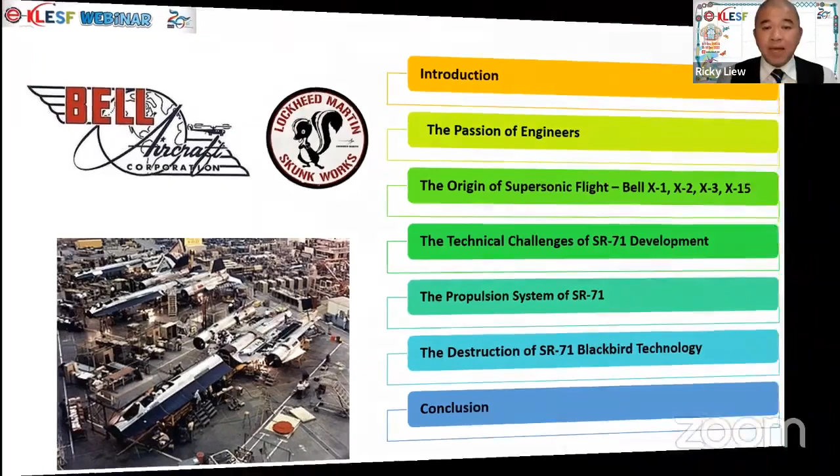Aviation industry is a highly regulated industry. The presentation here is very much general information and my own personal experience, what I have observed, the engineers that I've talked to, the research and development factory or the plant that I've visited. All this experience I gathered, and I plan to share it with all of you today.

The presentation is purely for knowledge purposes, and any part of this presentation does not negate the current requirements and specifications laid down. So don't say, oh, Ricky said this can, Ricky said cannot. What Ricky says is not important. It is actually what the regulatory body says, what the authority says, what the aircraft manufacturer says. Those are the important compliance that industry players have to comply with. For me, I'm just sharing information and my personal observation; it does not represent anybody.

I would also like to acknowledge all the sources of the information that I'm sharing with you here. They are all accessible to you. They are not high secret. They are all accessible from the books, from the internet, from the media sources, and some of the records or even presentation papers. What I did is compile it, couple it with my observation and experience, and make it into slides so that I can share with all of you. Hopefully, I'm able to inspire you all to consider taking up engineering subjects, technological subjects, science, or even mathematics subjects.

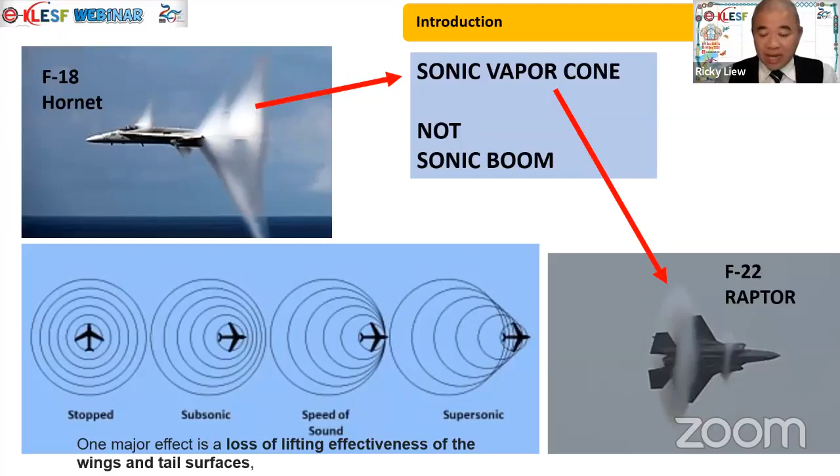Something we need to know: we talk about Mach number very much. What exactly does Mach number mean? Mach 1 is the speed of sound. The Mach number is a ratio of the object speed, the velocity of the plane or object, over the velocity of sound. So object speed over the speed of sound gives your Mach number. Mach 1 basically means the object traveling is at a speed equivalent to the speed of sound.

But what I'm trying to share with you today is not just about sonic speed. I'm talking about high supersonic speed. High supersonic speed is more than Mach 1: Mach 2, Mach 3 and above we call high sonic speed. But once you go beyond Mach 5, it becomes hypersonic.

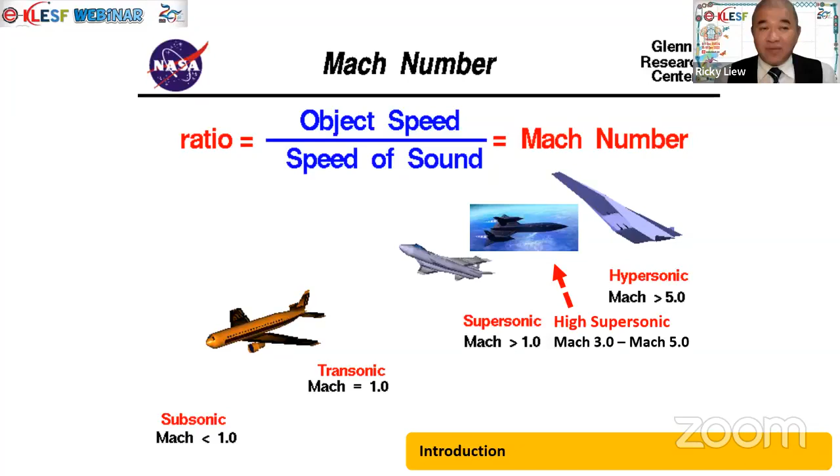So that is another different category of speed. So what I'm trying to share with you today is somewhere between Mach 1 to Mach 3 point something. Yeah, that's why I call it the high supersonic speed. Very interesting, because we started off with very low speed. Yeah, very low, probably 0.1 or 0.2 sonic speed. Until today, we are able to fly up to Mach 6, Mach 7. If you are talking about rocket, it is even much faster, which I'm going to show to you later.

Yeah, just a comparison. For the benefit of the participants here, just for comparison, what do you mean by Mach 1? Now Mach 1, we are talking of a speed of about 1,235 kilometers per hour, roughly. Because the Mach number changes when you are higher and also when you are lower at sea level. It is actually easier to achieve Mach 1 when you are at a high altitude. For example, when you are at 70,000 feet or 80,000 feet, due to the lower temperature and pressure, you actually achieve Mach 1 at a lower speed compared to when you are at sea level. But generally, for reference purposes, so that you have an idea what we are talking about.

So Mach 1, we are talking about 1,235 kilometers per hour. Now, when we are walking, our walking pace speed is about 8 kilometers per hour. Let's say we are just a general walk. We are not talking about the people who walk for competition. A general walk will be about 8 kilometers per hour, and the Mach number, if you convert it, is 0.0065. It's very slow. When we travel to Penang in the car at 110 kilometers per hour, the Mach number is actually 0.09.

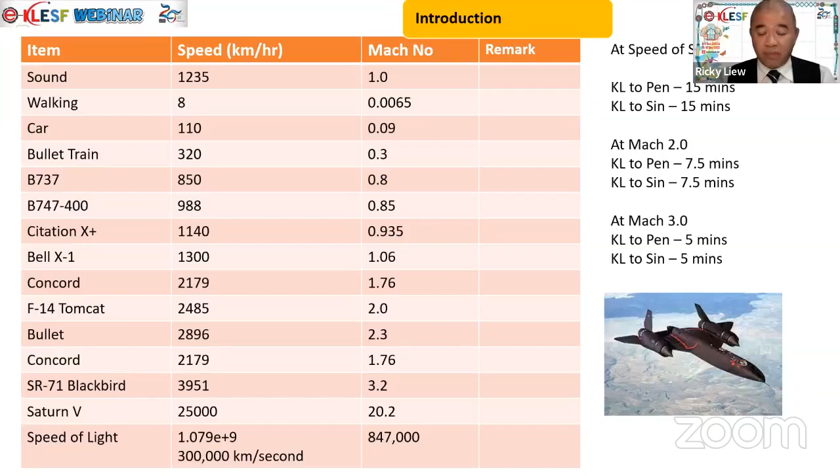So whenever humanity wants to develop, evolve and improve in terms of advancing their technology and quality of lifestyle, engineers play a very important role. Imagine your house doesn't have an aircon, because the engineers never designed or built an aircon for us. How are we going to have a comfortable life at a very hot temperature? So engineers have always been there for the benefit of mankind. It's a very noble profession.

I personally have touched the 1st, 2nd, 3rd and 4th generation fighter jets. The 5th generation, because of its stealth, highly secretive nature, I have not had a chance to touch or even view at a very close distance. But the rest of the planes, 1st to 4th generation, I have touched and felt, and I personally went and checked some of the systems on the airplane.

Now, if we want to talk about flight, there are these 2 brothers that we always have to appreciate. I think some of us would have heard about them. They were bicycle mechanics. They were not like you who are studying in university, having good lecturers and a good lab to do your tests. They were just bicycle mechanics who were very, very passionate about flying.

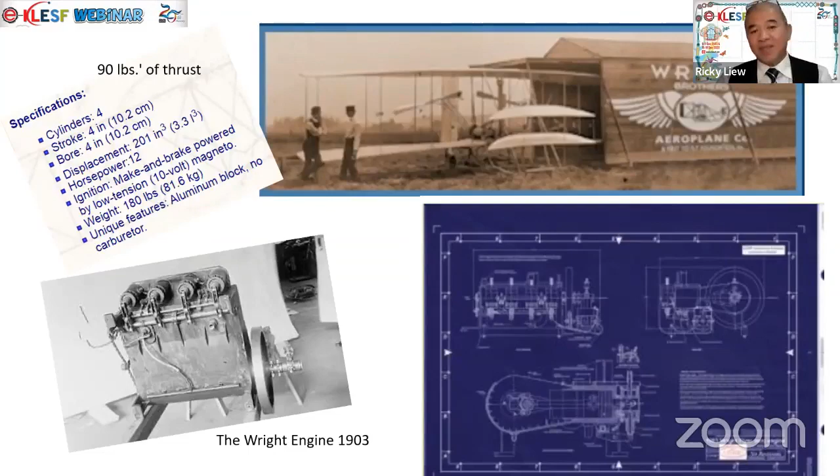Yeah, they had a lot of broken bones, twisted knees and ankles and all those, all for the sake of humanity's development.

Now moving forward, after the Wright brothers, the knowledge that we gained from the Wright Flyer actually moved engineering to the next level. That means the engineers, instead of flying a Wright Flyer with a very low powered engine, started looking for ways to fly faster.

Now in this talk, because we are talking about sonic speed and hypersonic speed, I will concentrate on the segment where they developed the supersonic airplanes. After the Wright Flyer, a lot of other planes came along, the Stratocruiser, Boeing, the Douglas company, with a lot of piston powered engines. But here we are talking about the sonic speed airplane.

Now, the sonic speed airplane has to start from this engineer, called D. Beeler. D. Beeler was the project engineer in charge of the XS-1, the X-1 aircraft, which was used to fly at sonic or even supersonic speed.

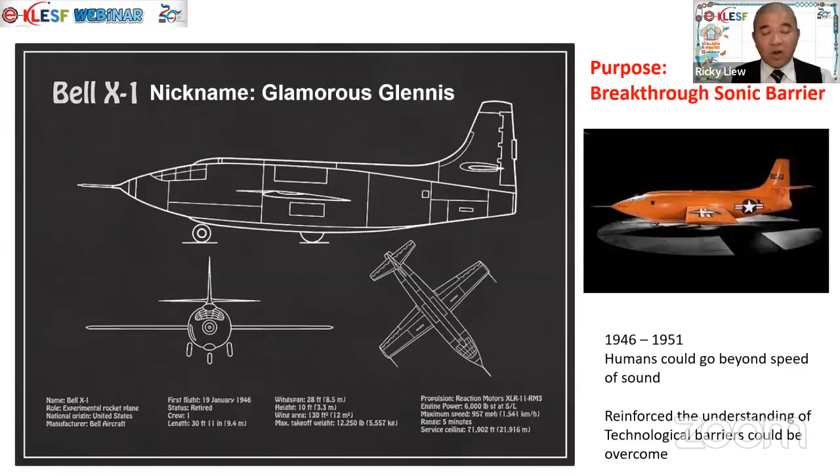It also reinforced the understanding of technological barriers, the sonic boom, the sonic shock wave. How are we going to overcome it? All the data were being gathered. If you look at this airplane, it is only a single seater. It's a very small plane, full of instrumentation and recorders, hundreds of kilograms of sensors, transmitters and data recorders. All these data recorders are mechanical or analog recorders. So the engineers came up with a lot of instrumentation to put inside this airplane.

This airplane got no weapons, nothing on. It just has rocket engines to make it fly as fast as possible. Even then, it can only fly for about 2.5 minutes, 150 seconds only. That is the window they have to collect all the data they can, so that the data will be passed back to the engineers, the scientists, the researchers, and then everybody together study and analyze and come up with a solution. And all these are manual calculations.

So being an engineer, if you are a person who has no issue with mathematics, then I think engineering is a very suitable position for you. Of course, nowadays we do manual calculation, especially when we are studying. But once you work in the industry, usually it is all computer programs, because we have the programs to do the finite element analysis, your heat transfer rate and all those. But for engineers from the start, we have to be strong in our calculation. Our mathematical skills are important.

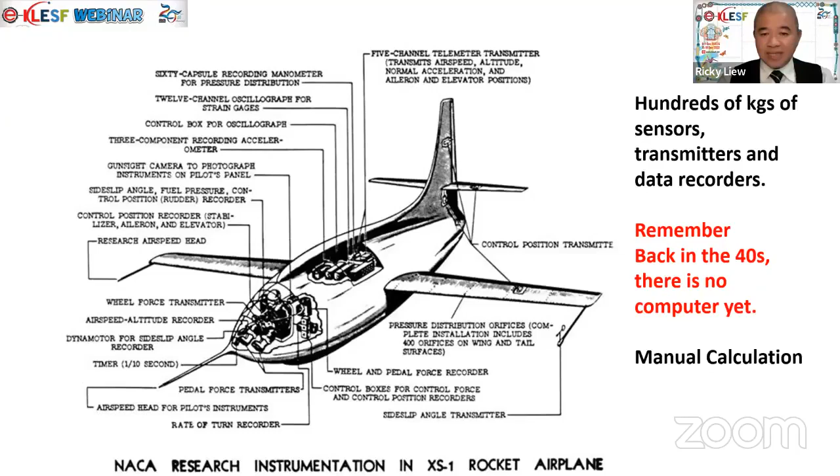This is the cockpit. This airplane, you can find it in the museum in the United States. If ever you have a chance to go to the United States like me, I've been traveling to the United States many times. Every time I land at a particular state, I always check first before I arrive whether there is any aviation or aerospace museum there or not.

Because if there is, I definitely will visit these museums and then take pictures and see how the engineers did it, where now we don't see it anymore. The past engineers, they were having so much limitation, no computer power, limited material, limited understanding, limited data about characteristics, and they managed to build the plane. So that always amazed me.

So design engineer D. Bieler is actually the first person who put a trimmable horizontal stabilizer on the airplane. Today, if you fly on a 747, a 737, a 777, even a 787, an Airbus 330, 350, all these airplanes actually have a trimmable horizontal stabilizer, where the horizontal tail of the plane can actually be moved, either to decrease the angle of attack or increase the angle of attack.

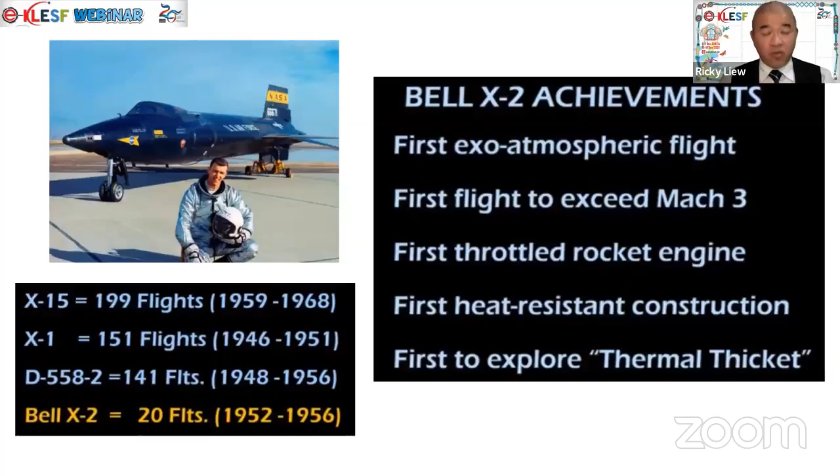Now, how do they launch the Bell X-1? They require another airplane, the B-29, to carry the X1 airplane. Because the X1 is very heavy for its size, because it uses a steel alloy construction, and you know steels are very heavy.

And why do they need to use steel? Because of the heat. You cannot use aluminum to make the fuselage of the airplane, because the moment you reach Mach 1, Mach 2, Mach 3, the skin friction against the air will generate a lot of heat, and that will cause a lot of problems on the airplanes. So they have to use steel.

Now, because it is a steel construction heavy plane, and at that time the turbojet or the turbofan engines were not available or in the infant stage, the fastest way to study sonic speed was to use the rocket engine, where you put in the fuel and the oxidizer, and then you just light it up, and it just continues to burn.

Okay. Now the restriction is that it only has a very small 150 seconds to collect all the data required. From the airplane speed of the B-29, the moment they drop the X1, the pilot in the cockpit will switch on the rocket engines, chamber 1, chamber 2, chamber 3, and then chamber 4, and they are supposed to control the airplane right up to about 43,000 feet,

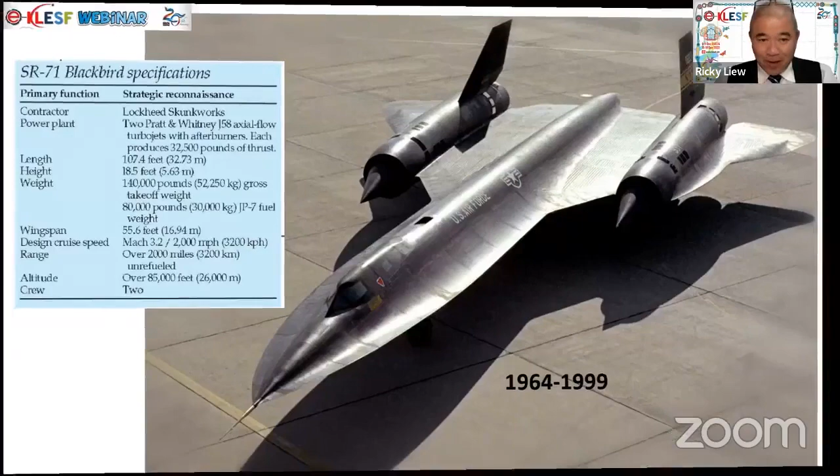Now, where does Kelly Johnson start from? Kelly Johnson is actually the engineer who was very passionate about airplanes. Even when he was a student, if you look at this picture here, this is at Michigan University, his university. At that time, he was still a student. And they saw this Lockheed Electra plane, the original design, being tested in his university wind tunnel. So he went and looked at the airplane, did a few mental calculations, applied a few principles of aerodynamics on this airplane, and he knew that this airplane is not a stable plane, it's an unsafe plane.

With the knowledge and the passion that he has in aerodynamics as an engineer, by looking at the airplane, he can actually know whether it's safe or not safe. And eventually, Lockheed modified the airplane and made the famous Electra plane. It is actually an H-tail plane. This is only a T-tail plane, very unstable. So Kelly Johnson, as a very junior engineer, came up with the airplane with the H-tail. Okay, this is his bird.

All right. Kelly Johnson also developed a lot of other fighters. We are talking about the P-38 Lightning, the Starfighter, and also the other spy plane, the U-2. All these are his ideas. So you can imagine becoming an engineer, you want to develop and defend a nation. How do you do it? It is by the application of your engineering knowledge for the nation. And that is what Kelly Johnson did.

Now, the SR-71 was actually built in 1964. It flew from 1964 to 1999. There were 32 of it built, flying at the speed of Mach 3.2, very high supersonic speed. Not one of the airplanes was ever shot down by the enemy, and this design overcame a lot of engineering problems associated with heat, not so much the supersonic shockwave anymore. There are some shockwave issues, but what they gathered from the X-1 has been applied and overcame a lot of problems. But there were also other issues that Kelly Johnson needed to overcome.

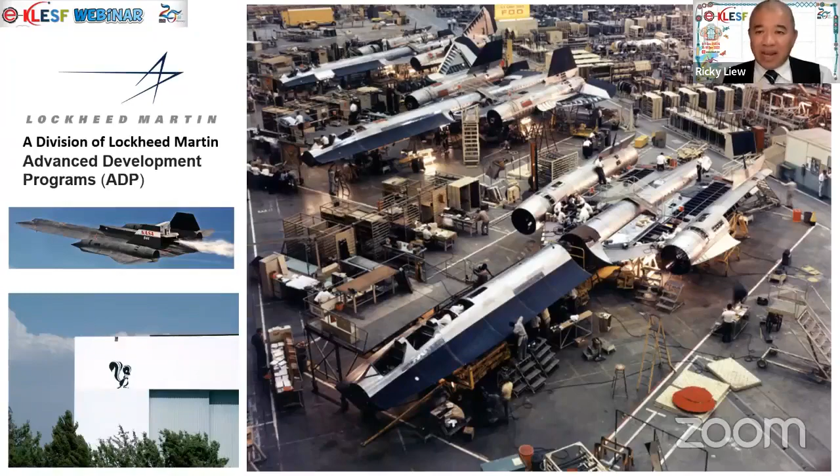And that is how passionate Kelly Johnson was. And the department is so famous, even until now everybody knows it as the Skunk Works, under Lockheed Martin. This is actually a division of advanced development programs. This is a picture. They don't build this airplane anymore. The blueprints are all destroyed. You cannot even find the molds to build the airplane anymore. But this is a picture of the factory, how it was built and assembled by the engineers, the technicians, and also the technologists. Over 30 of them were built.

Now, because of Kelly Johnson, remember just now I said, if you are strong in mathematics, if you are good in mathematics, one of the fun things you have is actually taking up the engineer's job, because you will use a lot of formulas to overcome and calculate a lot of problems and solve a lot of problems.

and incorporate them into their design of the planes, design of the wings, design of the finite element, design of so many things, the power, propulsion, and all those. Because the formula, the complex mathematical formulas, it is all there. It's just that you apply and use this rule. So Kelly Johnson came at the time of using this ruler.

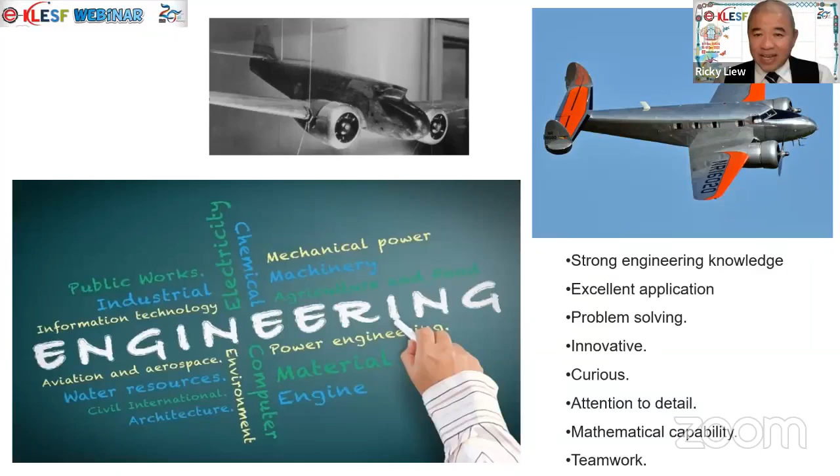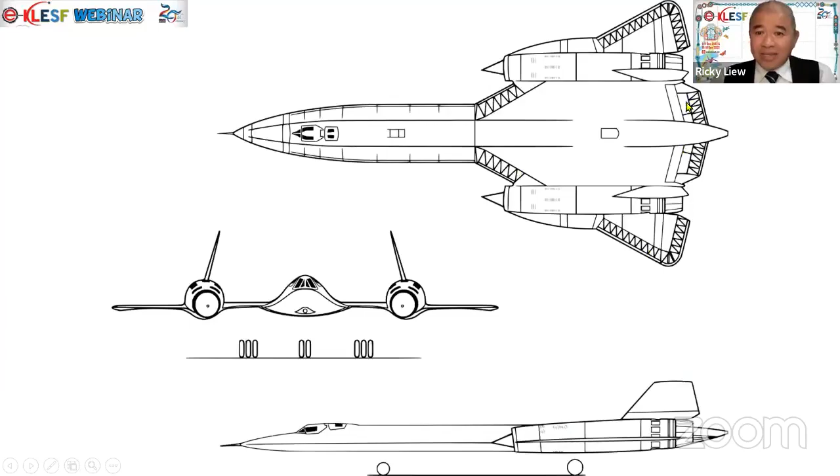Now, this is the SR-71. If you look at it, the diagram here is very futuristic, very interesting. Look at the engines, so long, and the shape of the delta wing, and you can hardly see the wing. You can see the engines more than the wing, isn't it? If you look here, on the side, it's more engine area, you can hardly see the complete wing. It's very small and stuck.

Now, I mentioned earlier, how did Kelly Johnson overcome it? If this airplane flies at Mach 3.2, the heat generated on the fuselage, on the cowlings, will expand it. So when the SR-71 flies at Mach 3.2, the length of the airplane can extend as much as 6 inches or even half a foot. That is a lot. Your wing might even get a little bit expanded.

How do you counter this expansion? Otherwise, your skin will be under stress. It already has heat stress, plus the expansion. Now you even have tensile stress. How do you overcome all this? So if you look at the wing design here, you can see all these lines. This is what Kelly Johnson incorporated.

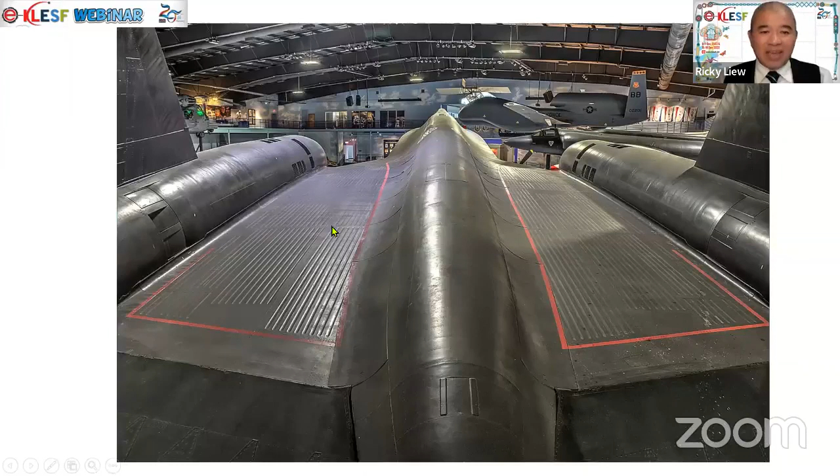When it is expanded, it will become flattened. If the wing is hot, it will become flattened and you don't see the lines anymore. And the airplane flies perfectly. Simple solution, but how many have actually thought about it? Engineers can turn a complex problem into a simple solution. That's our joy.

This is also another view of the plane. From the side view, it is actually a two-seater. You can see here the second seat, which is the navigator. The pilot is at the front. And these are the engines, J58 Pratt & Whitney engines. And this spike cone here can retract and extend.

Remember I said the shock wave is very damaging to the airplane. So how did they overcome it? They control the shock wave so that it does not reach the detrimental situation where your engines lose function and your airplane goes into a high-speed sonic stall. Okay.

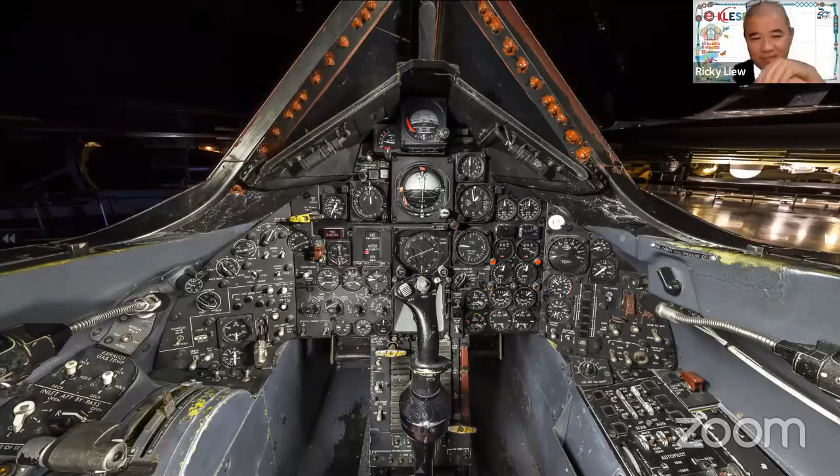Now, steam gauges. We call these steam gauges. The SR-71 was built in the 50s and started to fly in the 60s, and you can see inside all the analog gauges to monitor the whole system of the airplane, where the engineers incorporated the control switches, all in the cockpit. So you can imagine the amount of systems interfaced and built into the SR-71. And every switch, the pilot needs to know, the engineers need to know, in order to fly this airplane safely.

Now, we want to go to Mach 3.2, high supersonic speed. You don't go blindly. Correct or not? We cannot just go blindly, otherwise you will be in danger. So the engineers built all these instruments, including the control column here at the center. On the left-hand side, if you see my arrow here, that is the throttle quadrant. Now you can control the power: low power, middle power, climb power, thrust power, max takeoff power, everything. Whereas the rocket engine just now, the X-1, cannot.

So the engineers evolved the design in such a way that, okay, thank you for your data, thank you for your information. I'm now changing some of the information you have and incorporating it into the SR-71. And this is what you see.

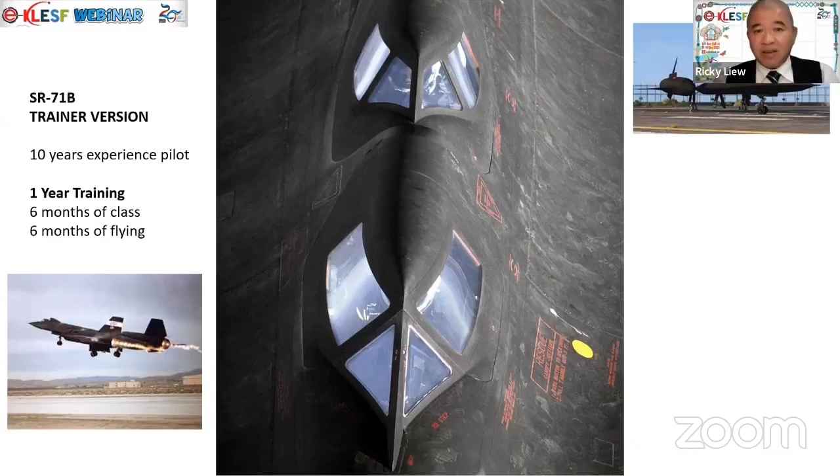Yeah, you can see it. I have seen it. I've touched it. It's a marvel. I've seen it a few times in the Aviation Museum in the US. It is a beautiful plane and it is a legend. When you look at this airplane, you remember the engineers who actually made this possible.

85,000 feet, it can fly at 85,000 feet, which is actually about 25 kilometers, with an ambient temperature of -55 degrees C, and only an atmospheric pressure of 0.4 psi. On our ground level here, we have about 14.7 psi. But as the SR-71 flies up to 85,000 feet, the air is so thin. How are you going to get your power from the engine?

But the J58 has been designed to be able to continuously produce power as long as there is air. Even though it is only an ambient pressure of 0.4 psi, you will be able to have sustained combustion inside your turbojet engine. This is a turbojet engine. It is not a rocket engine. It is a turbojet engine.

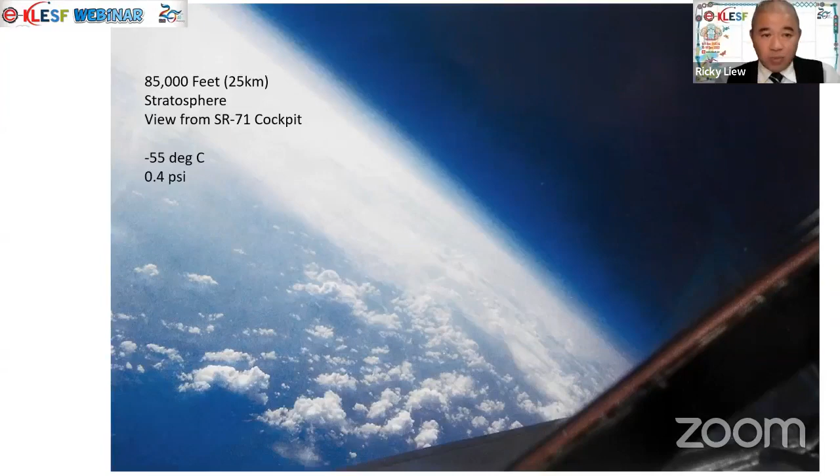Another view of SR-71. Remember, I said 32 of them. Out of 32, how many actually crashed? Anybody can guess? I mean 32 of them. Actually, 12 have crashed, because it is not easy to fly this SR-71.

None of it was shot down by the enemies. Every time the enemy tried to shoot this airplane, they had difficulty because it's flying too high, 85,000 feet. And even when the enemy approached this airplane, all this airplane has to do is put on the speed and fly at Mach 3.2, because there was no other plane in the world that could catch up with this airplane at that time. Mach 3.2, it's flying too fast.

This is the pilot who goes up in the SR-71. Remember, even though the engineers developed the technology for the high supersonic airplane, the pilot also needs protection. So the pilot actually wears an astronaut-level kind of suit, where the suit itself is their living environment. 85,000 feet is very cold, so they basically have to live in a suit that is air conditioned.

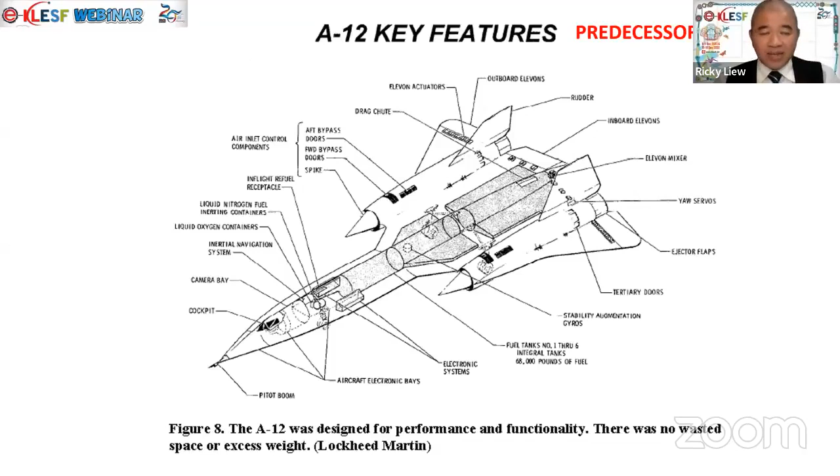But this SR-71, they store it in the fuselage. Why do they store it in the fuselage? Number one, there's no other space. Number two, the fuselage will be heated up, and the heat will be used to heat up the fuel before going into combustion.

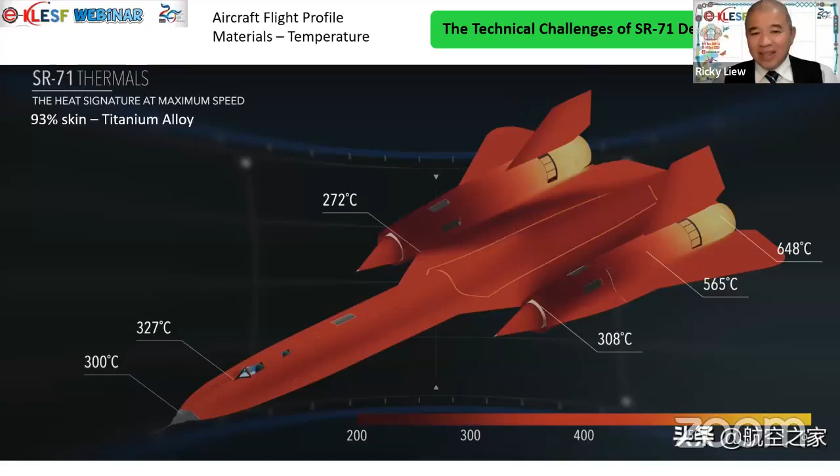Now this is a graph of the temperature. And they fly at Mach 3.2. The material they use to build this SR-71 has moved from steel to titanium. Remember just now I said X1 is made of a steel alloy. We cannot put steel alloy on an SR-71 because it will become too heavy and not practical. So they came up with a new alloy. They call it the titanium alloy.

And the titanium alloy is able to take a lot of very high temperature, as good as the steel, but then it is very light. So the majority of this airplane, the fuselage and all those, are actually made of titanium. Why? Just look at the temperature here. At the nose itself it is already 300 degrees centigrade, 3 times the heat of our water boiling temperature.

Now, if you look at the cockpit area near the window here, it is 327 degrees C. Remember I said just now, even the pilots have to wear an air conditioning suit. It's because of this heat. And if you go towards the tail, especially near the engine exhaust, it is 648 degrees centigrade. On the skin itself, temperature is so high. The only way the engineers could overcome this problem at the time was to use a titanium alloy. 93% of the skin uses the titanium alloy.

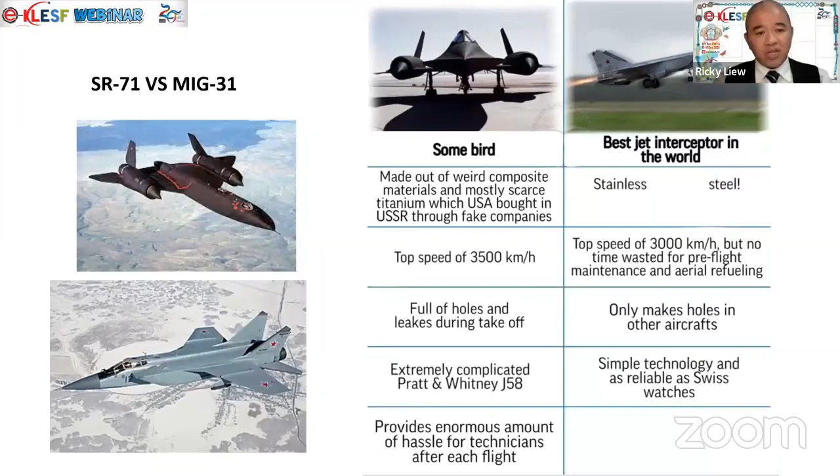Okay, a quick comparison between the SR-71 and the Russian jets as well, but the speed is still not as good as the SR-71. The Sukhoi technology or the MiG technology still has a lot of weakness.

Now, the manufacturing process on this SR-71 actually has a lot of difficulty. The material used is very hard. Titanium is very, very hard. So it is impossible to forge the parts, and your machining rate is only 5% compared to the aluminum alloy. If you think about, let's say, 100 hours to machine one aluminum alloy part, it will only achieve 5% of your output compared to the aluminum alloy.

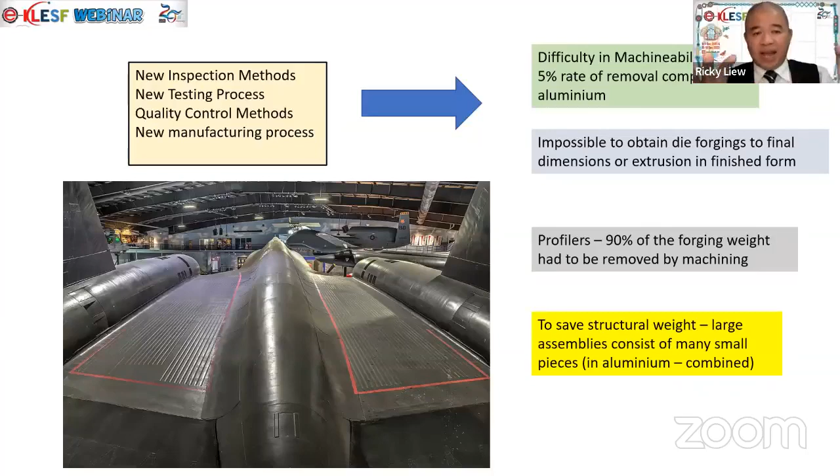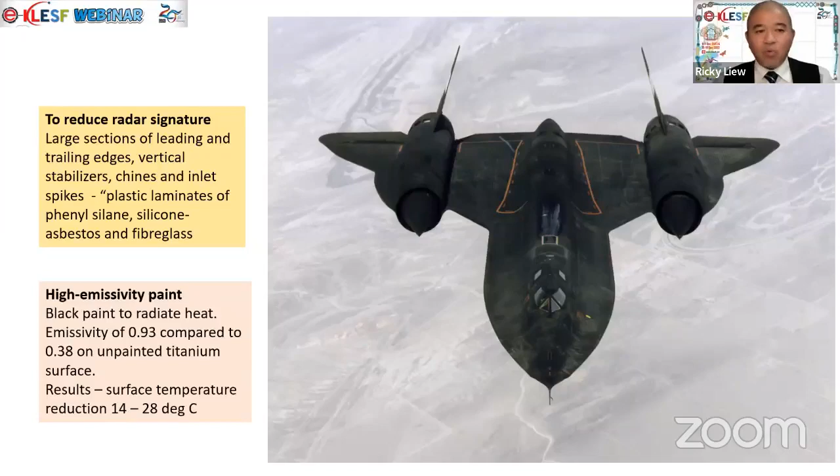For the inspection process, the engineers had to come up with new inspection methods, new testing processes, and also new quality control and manufacturing processes. That itself is another leap of advancement for the engineers and the technologies. It uses a black paint to radiate heat. You see the Blackbird is always black in color. Why? Because it is actually used to radiate heat.

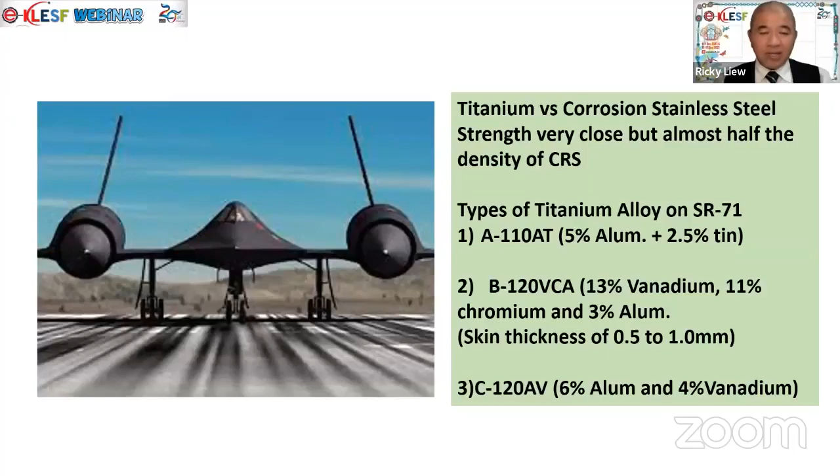This is the alloy that I mentioned, titanium alloy A-110AT, 5% aluminum plus 2.5% tin. There's also another one, B120 VCA, vanadium, chromium, and also aluminum. Of course, how they produce this kind of material is proprietary. Nobody knows how they produce it. But generally, we know that titanium has been used extremely widely on the SR-71, even in the Concorde as well.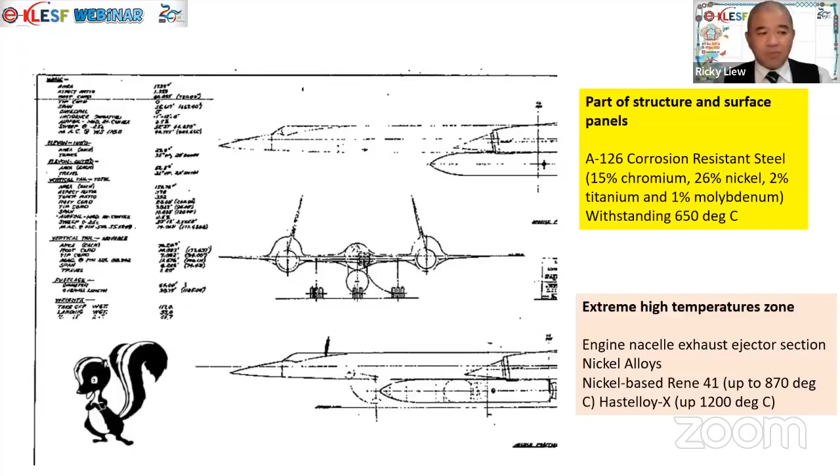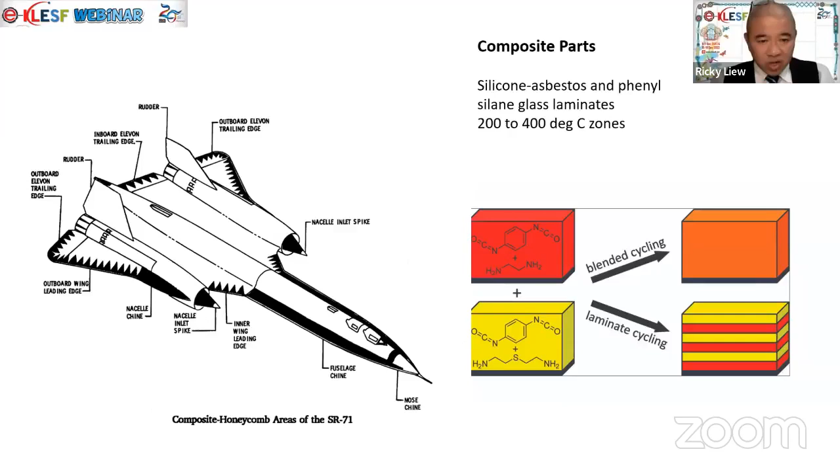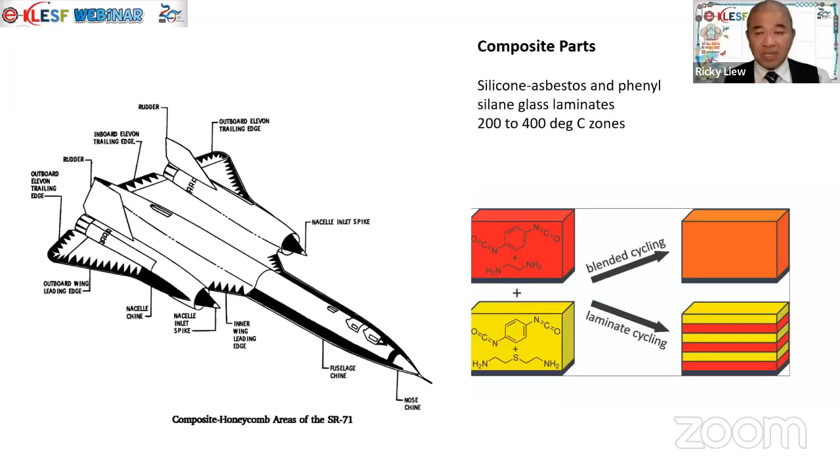This silicon construction can actually withstand temperatures up to 400 degrees centigrade. That is actually being used. So composite parts have been applied on airplanes since the 40s and the 60s. Widely used. Now today we have very advanced composites, the 787 and also the Airbus A350. Their fuselage is no more metal. They use composite materials to build these modern planes. Another view of the SR-71, very majestic, very beautiful.

Now let's talk about the engine. The engine mentioned just now was a rocket engine, but this one is a Pratt & Whitney J58 turbojet engine. It is a pure turbojet. It's not a turbofan engine, which means that the air going into the engine will all be burned up, only during the afterburner stage, when they want to apply the max speed. You can see the pipings here.

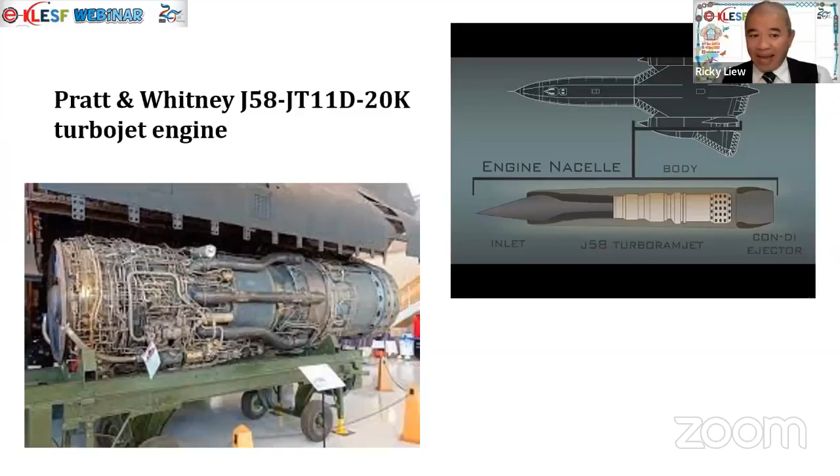These are the pipings that carry the bypass air that doesn't go into the core of the engine anymore. It goes straight into the exhaust, where the afterburner is used to ignite the fuel to sustain the max speed of Mach 3.2. Even that engine is highly technical, but it is all mechanical: mechanical engines, mechanical fuel computers, fuel control unit. This is also another view of the engine.

If you remember, just now I mentioned this cone here. This cone actually moves according to the speed of the airplane. The main purpose of this cone is to reduce the shock wave interrupting the airflow into the engine. This data about the shock wave, the learning of the shock wave, came from the Bell X-1, understanding the shock wave effect on the gas turbine engine, especially at high speed.

To start the engines, they have a starter. And this starter is actually made of car engines. The car engines are modified and installed on this cart, and then they use this cart to start and spin the engine up, so that it can start the engine on the ground.

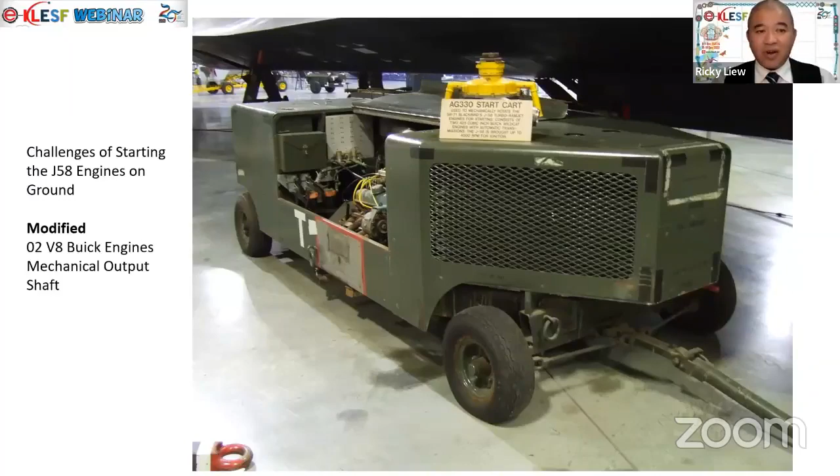Another view of the J58 engines. This is a view to show you that just now, the rocket engine used oxidizer, oxygen, and also alcohol. And this engine actually uses JP-7. It has a very low vapor pressure and a very high flash point. So even if you light a cigarette and throw it on this JP-7 kerosene fuel, it will not light up. So how did they actually light up the engine?

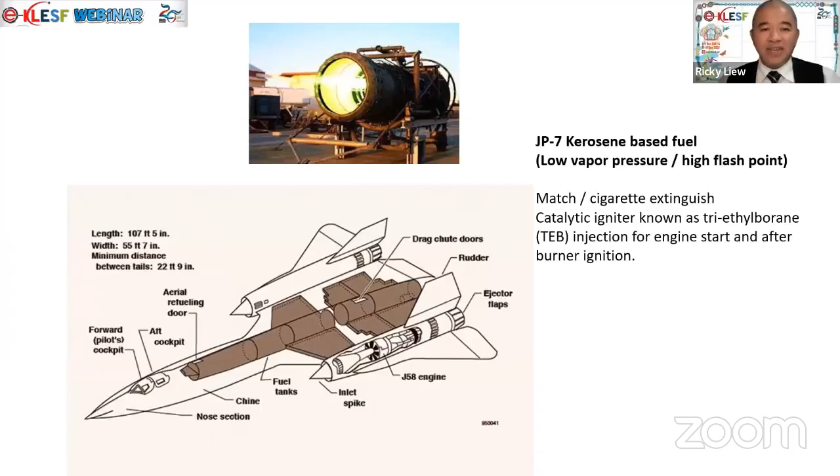The engineers came up with a special chemical. They call it triethylborane injection. This triethylborane is basically an explosive ignition. The moment it touches air, it will explode. And that is what the engineers use to light up this JP-7 engine. Marvelous, right?

So we have this high supersonic speed. We have cutting-edge materials, remember, titanium alloys. It has a monocoque structure, multi-spar, and then the fuselage and the fairings, the chine on the side. You can see on this plane, on the side here, those are also lift-generating devices, not only the wing. We used to study only the wing, right? But this chine is also an aerodynamic lift device, which means it can support 20% of the aircraft's total lift, which is quite significant.

Quite significant. And they came up with chines that reduce the trim drag. And the vortices from these chines improve the directional stability of the plane, especially as the airplane increases the angle of attack. And the chine also provides a convenient housing for the wiring inside the aircraft. Remember, this airplane is a spy plane. I think a few thousand kilos of camera equipment are put on board this airplane.

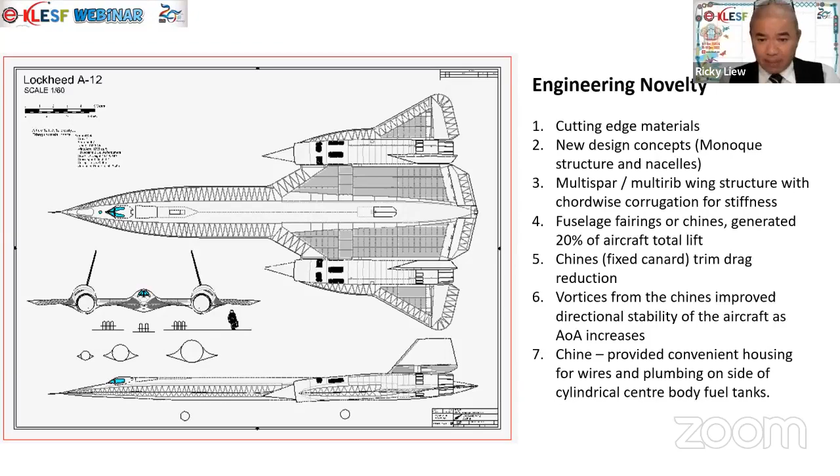However, in 1968, despite the marvel of this technology, President Lyndon Johnson issued an instruction that all molds and tools used to build the SR-71 be destroyed. That came from the President's office, so that the airplane can never be built again. So for other people to imitate or emulate this design again, it is very, very difficult. So the SR-71 will generally be lost.

The technology availability is actually lost. Nobody can take it anymore. You can see the airplane, but if you try to build it again, you will have a lot of difficulty. The reason is that they did not want the enemy to get the technology. So a bit sad, because to me, advancement of technology is also advancement of power and authority. I hope Malaysians can move in that direction, where we have a lot of engineers, technologists, and technicians to together help build the strength of the nation.

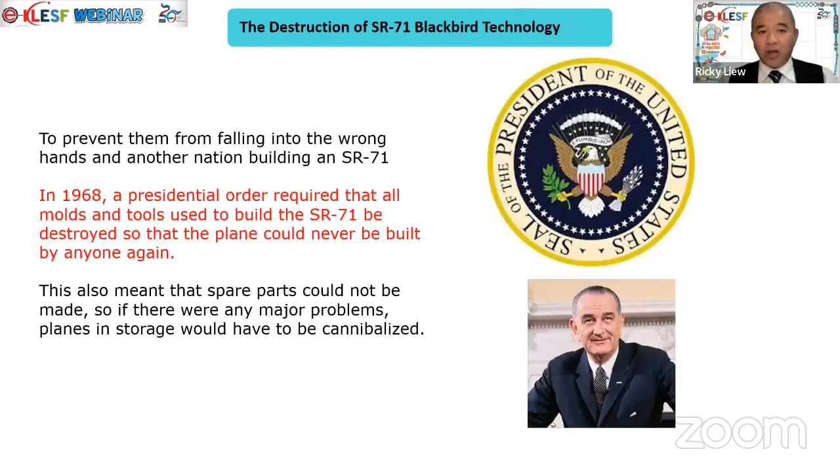There's so much satisfaction inside us that you just find that with this job, you can't even believe that we are being paid for the job. Do you know that as an engineer, you come to a stage where there's so much excitement and fun that, wow, we are even being paid for the job. So that is the joy of an engineer.